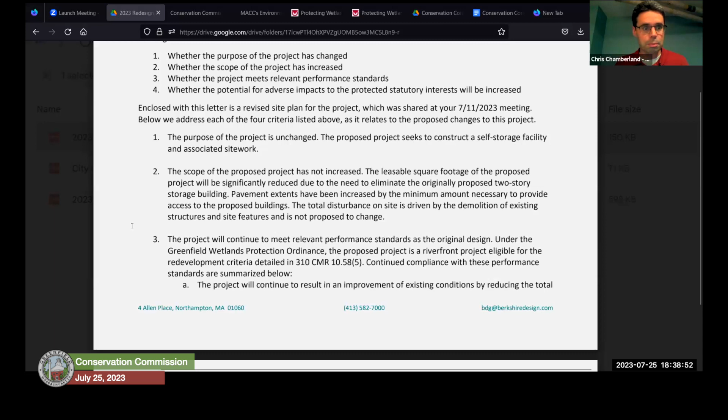My understanding from the conversation a few weeks ago was that the commission generally agreed the project was eligible to do an amended order of conditions on the first 2 points, and was potentially open to seeing the same on points 3 or 4, but required additional information. Shortly after that meeting, I submitted a letter covering all 4 points for the record, specifically addressing points 3 and 4 in detail. I can go through it if everyone has read the letter, or we can just do questions.

Yeah, and I just shared... oh, am I muted? No, I just shared that. I was muted, I forgot I was muted. So this was the letter that we received. Hopefully everyone's had a chance to look at it.

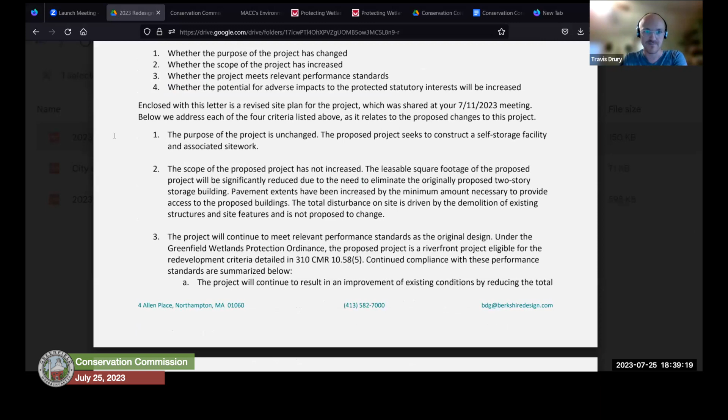So number 1 there is whether the purpose has changed. I don't know if anyone has any questions off the bat, or maybe it'd be good if you just wanted to walk us through the ones we were a little unsure about.

Sure. Question 3 is about performance standards. Essentially what I've done here is look at this new design and how we plan to show that it continues to meet the riverfront standards, because under the local bylaw we're in a riverfront zone, and on this site we're applying the redevelopment criteria, which is how the original project was approved. I'll quickly go through each of those riverfront criteria.

I'm going to pull my regs out, because I always write these letters showing just the answers, but sometimes I get confused on what the question was 2 weeks after I wrote it. So the first riverfront standard is to create an improvement upon existing conditions.

Here we are continuing to have a reduction in total degraded area on the site. We have existing work that runs practically right up to the edge of the stream, and in the proposed condition, all degraded area will be at least 25 feet or more from the stream. Additionally, in the existing condition there is no stormwater management whatsoever, and we're building stormwater management that will significantly improve both infiltration and water quality.

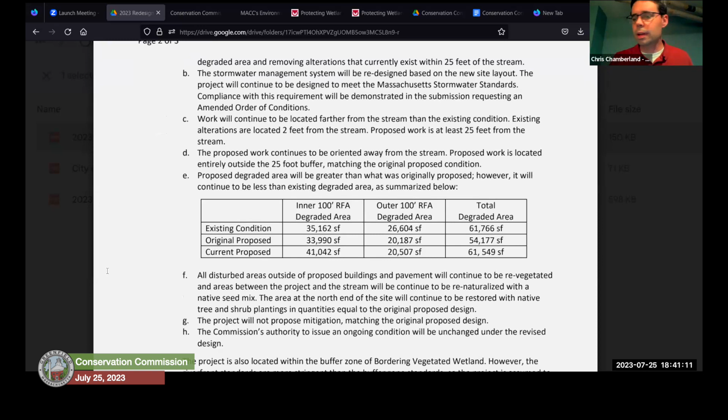The second point is that the project meets the stormwater standards, based on preliminary design, and we are still working on finalizing the stormwater design. We will probably still be working on it right up until the moment we submit our revised package to you, but I don't see anything that's going to prevent us from meeting the standards to the same extent we are now. I go into that a little in number 4, so I'll address that in more detail in a second.

Criteria C is about locating further from the stream than existing conditions. This one we continue to meet. Like I said, the existing alterations come right up to the edge of the stream bank, whereas proposed work respects the Greenfield standard 25-foot no-disturb zone. So we're certainly further back than existing work in that case.

Can I just clarify, I'm pretty sure when you're saying existing conditions, you mean before any work is done on this project? True, yes, not the original NOI or the existing approved plans.

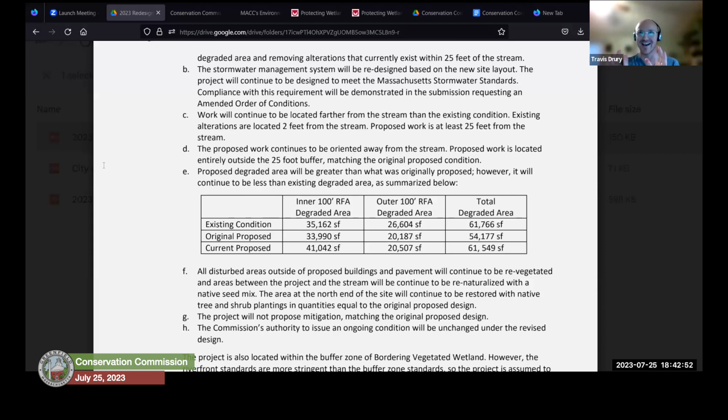Yes, so this is essentially a preview of how we will show our new design complies with the wetlands protection standards, redeveloping from the condition before we got on site earlier this year. I just want to point that out because I think in the last meeting we were talking past each other for a few minutes, where some of us were saying existing as in what's on the ground, and others meaning existing as the approved plan.

Yeah, and so the vocabulary I used here was, I typically tried to say pre-development, but pre-development and existing meaning what the site was before the project started, versus the originally approved condition. Let's try to manipulate the language on that one to keep it clearer. Okay, thanks.

Condition performance standard D: proposed work shall be located outside the riverfront area, or toward the riverfront boundary away from the stream, with a couple of exceptions. The entirety of this site is riverfront area, so it's impossible to be outside of the riverfront area and still construct a project.

But as noted before, at a minimum we are respecting the 25-foot no-disturb zone, which is the locally imposed no-disturb zone. To the extent we can, while still meeting the goals of the project, we've tried to bring things further away from the stream. The footprint of disturbance of this project is really driven by the demolition side, because of the extensive alterations on the site. So the total limit of work is really unchanged from what has been approved.

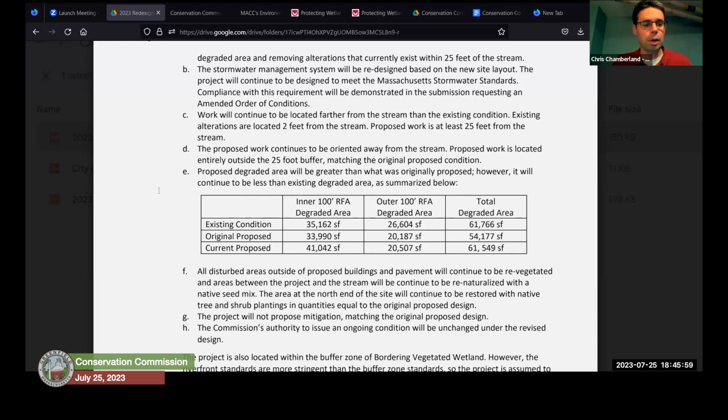However, there will still be a reduction. We will not exceed the existing condition from the beginning of the project for degraded area. And again, as I mentioned, total disturbance is unchanged from originally proposed and approved.

F deals with restoration, and the approach here is really unchanged. The limits and locations of where restoration will occur have changed, but at a high level, there will be a limited amount of formal lawn area at the front of the site to dress things up along the street, primarily between the buildings, pavement, and the street. All other areas are proposed to be planted with a conservation seed mix of native species.

I don't remember the exact spec, but it's from New England Wetland Plants. That covers all the edges between the proposed work and the stream and wetland areas. We'll get that native seed minimally maintained. And we're going to continue the restoration area we had proposed at the north of the site, with more robust plantings including some native shrubs and trees.

If you'll recall, that's the area where the building—the old rug building itself—went right up to the edge of the wetlands. That building has come down, and that area is slated to be totally restored in that extra-sensitive 25-foot area with native species and more robust planting.

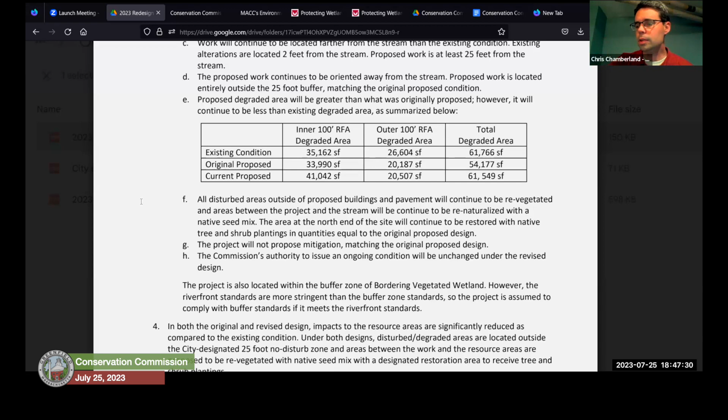G is about mitigation, which we are not pursuing because our proposed project does not exceed the existing degraded area. Standard H is just notice that the Conservation Commission, as the issuing authority, shall include a continuing condition prohibiting future alteration within restoration and mitigation areas, with a few exceptions. That's the Commission's power—we have no say over that, but we're noting that we understand it'll still be true.

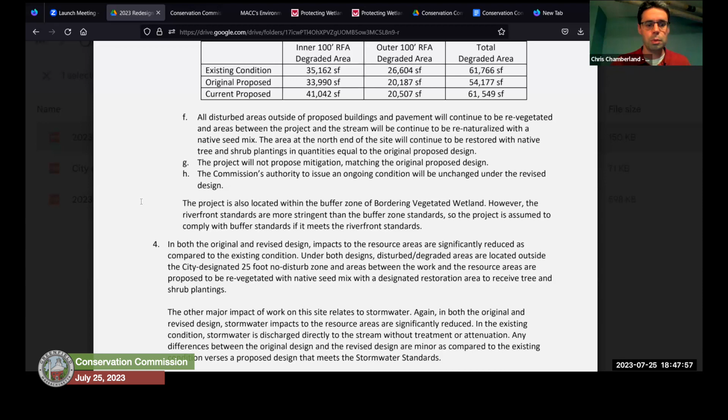I'll quickly note that while under the local bylaw we're in riverfront, under the state bylaw this is a buffer project. The standards for riverfront are generally accepted to be higher than the standards for buffer, so if we continue to comply with the riverfront standards, I'd say we pretty clearly comply with buffer standards.

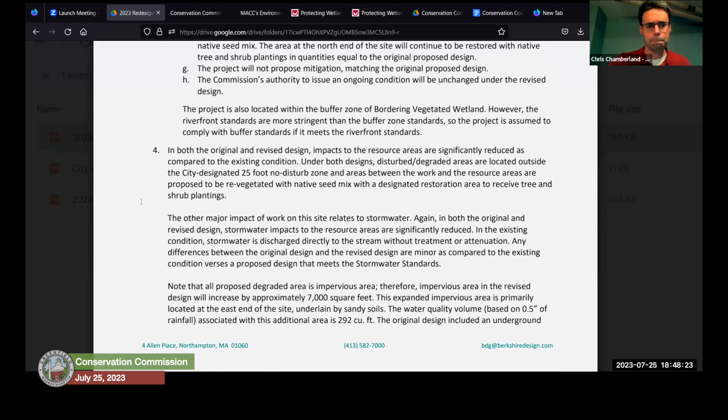Point 4 is whether the potential for adverse impacts to the protected statutory interests will be increased. This one is a little bit in the same vein as number 3, but a bit more broad, so I broke it down to look at it a couple of ways.

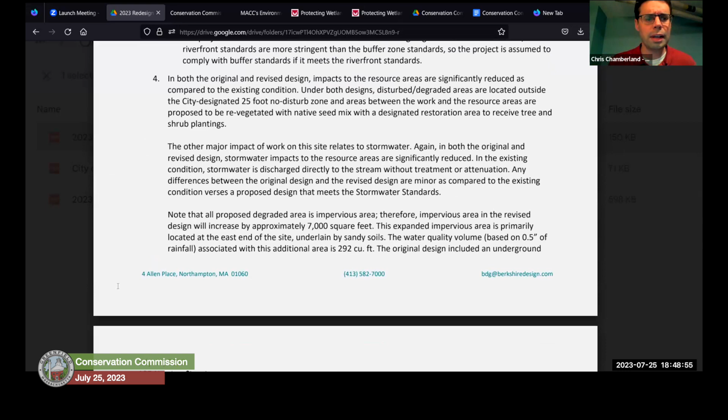Under both designs, disturbed and degraded areas are located outside the city's standard 25-foot buffer, as I've said a couple of times already. We're revegetating with native seed mix, so that perimeter area separating our project from the wetland resource area—we're still proposing to treat that the same way, with the same minimum offsets.

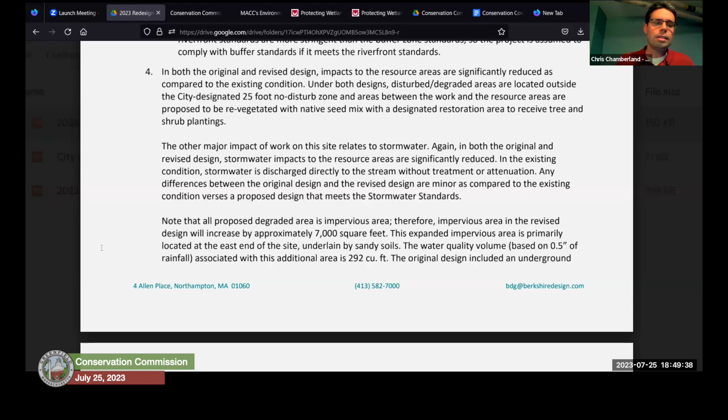We're still going to try to ensure that we're catching snow piles in areas where sediments can settle out, and we're still putting in that renaturalized buffer with natives between the work and the resource area. The other, probably largest, impact on resource areas on the existing site is stormwater. In the existing condition, you've got building and paved areas, compacted gravel, and all sorts of disturbance that runs off straight into the stream.

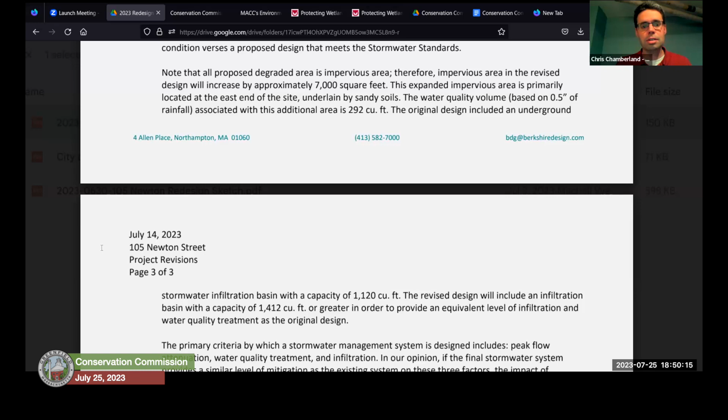In the approved plans, we implemented a stormwater management system that captures virtually all of the impervious area and either treats it for water quality or treats it and infiltrates it, and also avoids direct discharges to the resource areas. Really the only areas that drain directly to the stream are now the vegetated, revegetated areas. I want to say that we have almost no untreated discharges from impervious surfaces on the site, with the possible exception of one of the small buildings to the south.

The proposed stormwater management system is going to have some adjustments, but it's going to work very similar. We're still going to have an underground infiltration system in the part of the site where the soils are good. We're going to need to increase it because we've got more impervious area than was proposed in the approved plan. So I've shown here what the additional water quality volume associated with that additional proposed impervious area is, and I'm very confident that we're going to be able to increase the infiltration system to provide that additional water quality volume.

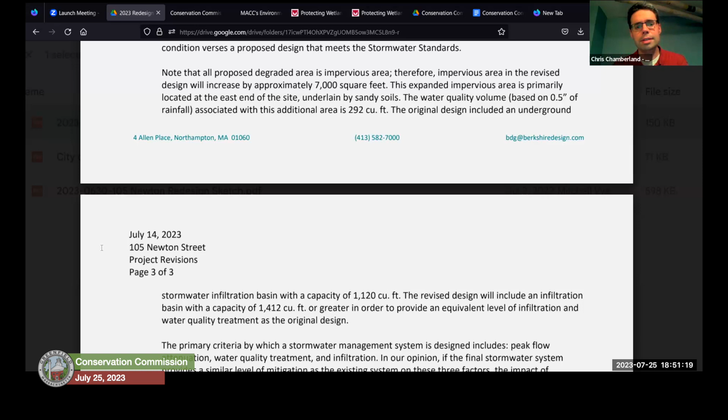We're going to continue to capture most of the pavement on the site and treat it through the Stormceptor water quality units. We're going to continue to have a rain garden at that north end of the site where the soils are poorer, to capture the impervious area and then under drain that to the city system. We're going to adjust the sizing, but I haven't seen anything yet that's going to prevent us from essentially meeting the same benchmarks in terms of peak flow attenuation, amount of water infiltrated, and water quality.

And the caveat to all of this is, if I show you that that is true after the system is designed, then I think we would pretty confidently say that our level of impact from stormwater on this site is equivalent to what's already been approved.

And then just as a wrap up sentence, essentially saying what I just did, so I won't say it again.

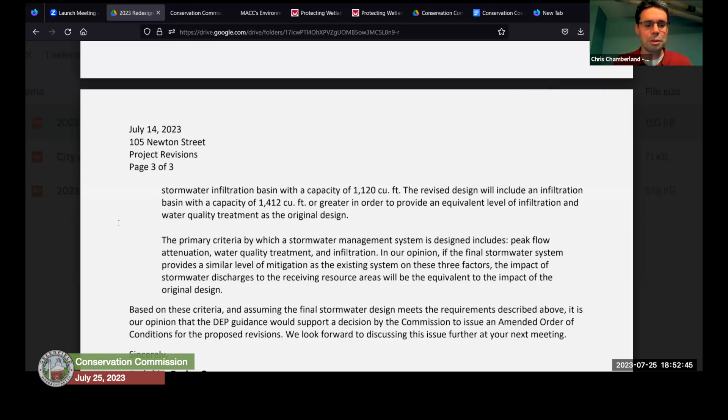That was going to be my question, Chris, is you've rerun some of the calculations, but haven't generated a new stormwater report, correct? Yep. We are actually, just the last couple of days, getting close to a final grading plan, and as you say, ran some initial stuff. I don't see any red flags, but drainage design's an iterative process, so it's going to be ongoing for a little bit still.

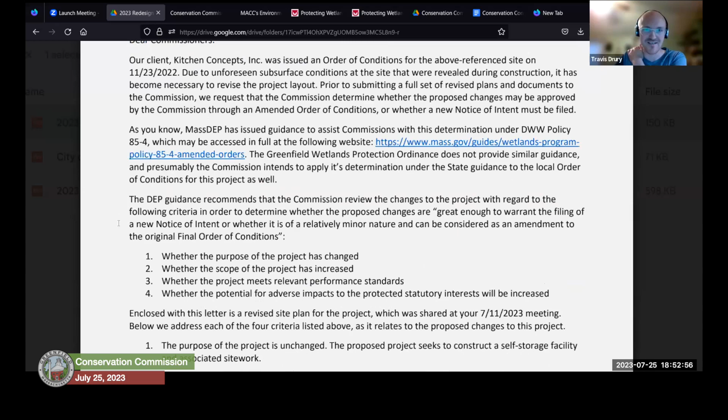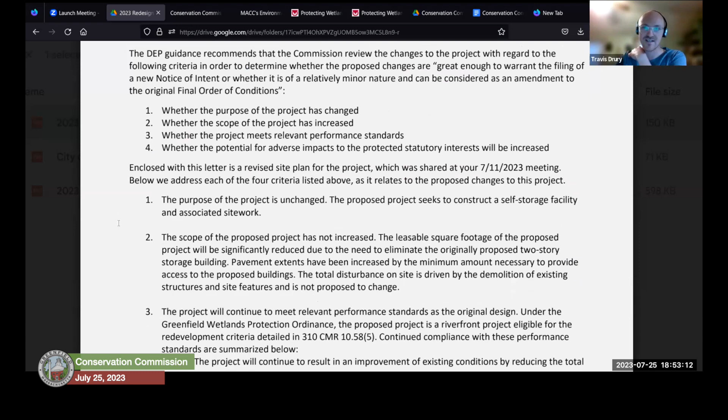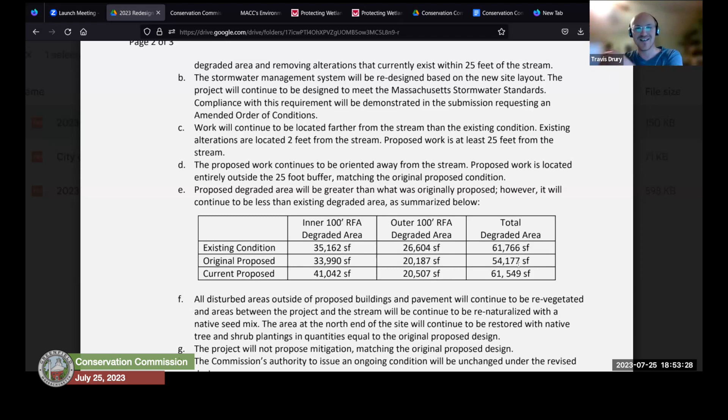Well, thank you for putting together this letter. I think this is very helpful, at least I feel like it is. I think one of the things in the last meeting, I was kind of hung on number 4, whether the potential for adverse impacts to the protected statutory interest will be increased, and especially with the amount of the extra pavement that there would be, and how it's actually increasing the degraded area compared to the original proposed. But I think something in my head just clicked while you were doing this presentation.

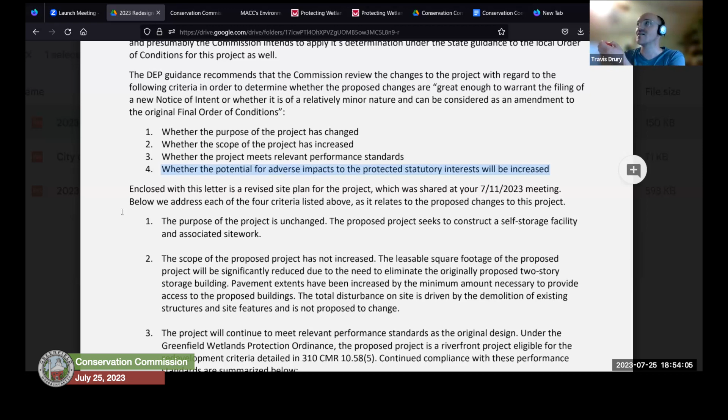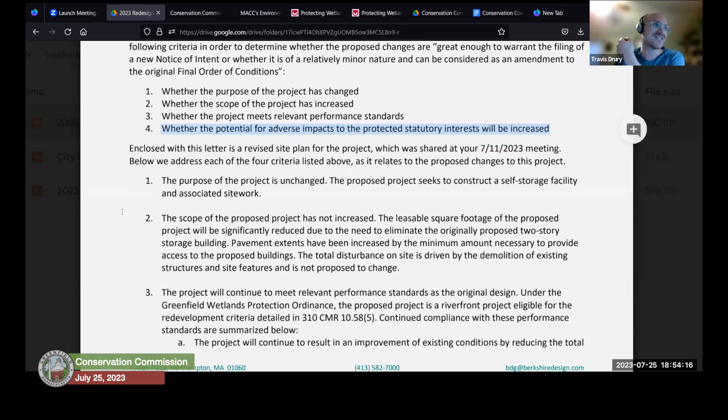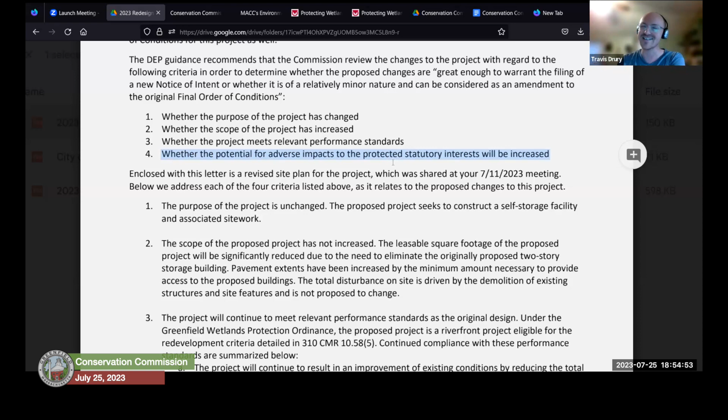Now the way I'm reading this is the potential for adverse impacts to the protected statutory interests - if it sounds like the approved plan and this plan are both redevelopment and should be improving over existing conditions, then it's not adding any adverse impacts, but perhaps we would say it's not giving as many beneficial impacts. It's not as beneficial, but that doesn't mean it's adverse. The way I'm reading it right now is the potential for adverse impacts would be like if we're changing the plan and now we have to pave over this 50 feet of wetlands that we weren't going to pave over before - that's actually having adverse impacts, instead of, we have to reduce our rain garden size. So it's still going to be better than it was, but it's just not going to be as good as it was. I guess I feel like that's less improvement as opposed to more adverse impact. That's kind of how I'm feeling.

It depends on what it's referencing there. We don't have to answer 100% emphatic yes to every one of these questions for us to move the project forward. But I say that because I think the way I'm reading this is it's saying the amended conditions versus the proposed project, or amended project versus the proposed project. But I could be wrong. Yeah, I hear what you're saying, whether it would have potential for extra adverse impacts.

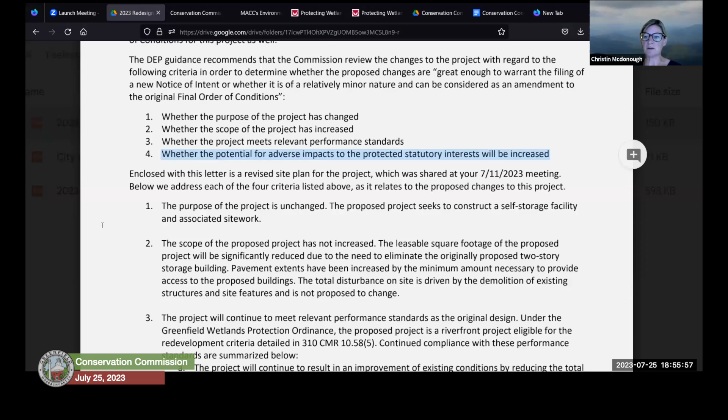But 7,000 square feet of impervious surface next to a wetland system is potentially adverse with a storm event that overwhelms the drainage, but it's not huge. Well, that's to the inner 100, that's the inner riparian zone. My question is, how are you beefing up the restoration or mitigation to compensate for that additional 7,000 square foot within the inner riparian zone?

I'm just curious, what's changed from the original submittal that will sweeten the pot to compensate for that, to offset that additional impact? Yeah, I think that would be fair.

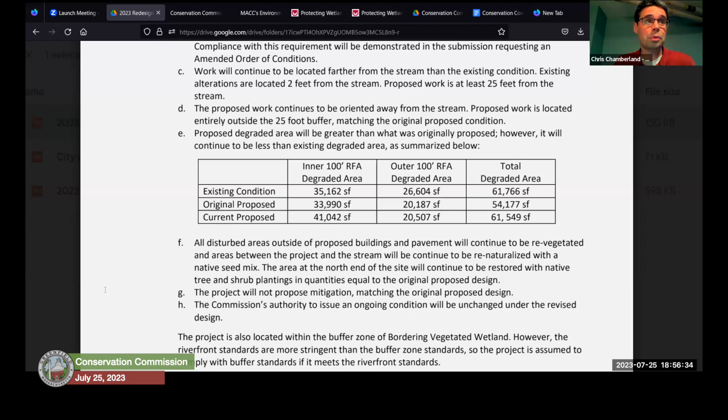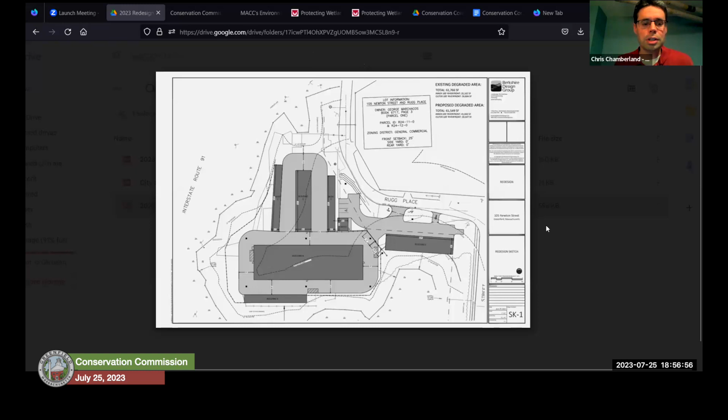Our original plan focused all of our real restoration effort on the northern end of the site, though of course we reseed everything on the backside of the property. So in reflection of the fact that we now have a relatively small reduction in degraded area versus the existing condition, I think it's fair to continue extending that restoration area around.

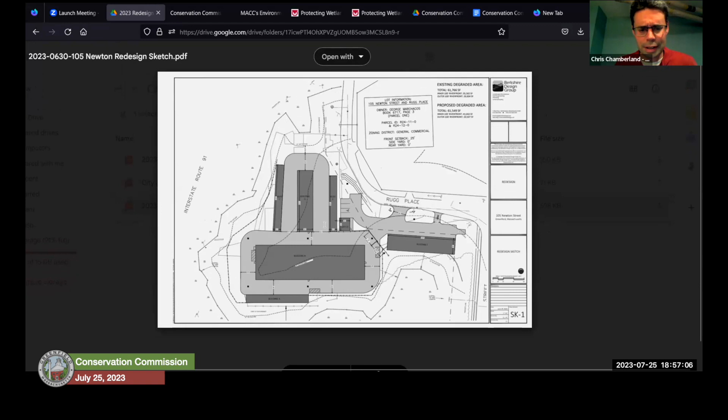Let me see if I can point to this instead of waving my mouse where you can't see it. If you have plans you want to share... How about I do it and then I can point to things more clearly.

In the originally proposed project, all the planting was focused on this buffer here with the shrubs and trees, and all of this area was just reseeded with natives. I think in light of the fact that we now don't have the major decrease in degraded area that we were proposing before, it would be reasonable to increase the extent and impact of the enhanced restoration planting, which we can easily continue.

If we were focused on this area before, we can round the corner behind the site over here. There's also lots of area that, while not wetland, is pretty sensitive down in this area that was just slated for native seed restoration. I think we can certainly increase our true restoration area in light of the fact that our degraded area is also increasing relative to the approved plan.

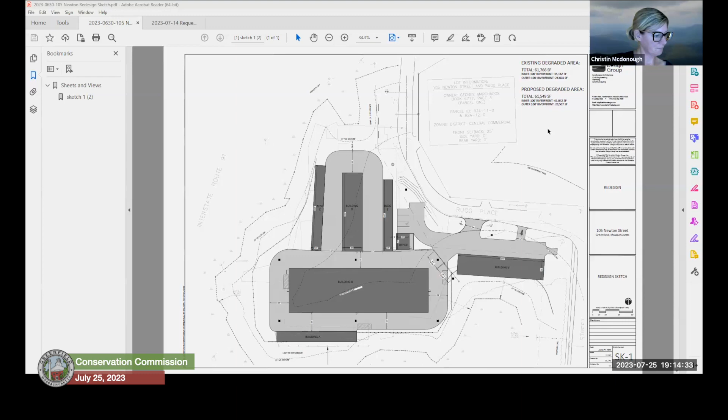Okay, so we will vote on allowing them to file an amended order of conditions. Fletcher, aye. Christin, aye. All right, and I am also an aye. So you have our approval to file an amended order of conditions.

Thank you, appreciate it. Obviously, we did not want to waste a whole lot of time going down the wrong road, so this is helpful guidance. All right, thanks for going through all those details with us. Yes, and that gets us a head start when we come back with the real evidence. Yeah, thank you. Okay. Great, and we'll see you soon. All right, have a good night.

Okay, so next we have on the agenda any topics not reasonably anticipated 48 hours in advance of the posting of this agenda. I'm guessing maybe there's an emergency order. Yeah, we have, boy, three emergency certs.

That's it, that's it so far. There were like 24 in Deerfield when I went to a site walk with the Deerfield Concom last week. Wow, on Friday. Man, yeah, they have it bad. Franklin County is bad.

I think we have someone here from DOT. We can start there. Sure. Hi everybody, I'm Billy Lee. Hello, I'm the Mass DOT District 2 environmental engineer.

I actually, right before this meeting, sent Mitchell over the emergency certification request for some Mass DOT improvements on Route 2 off of Adams Road, right over the Fall Brook, not Fall River, Fall Brook crossing. And Mitchell actually signed that, so we have the executed emergency certification. Work has kind of been ongoing since the storm, just like emergency stabilization of the embankments, but essentially what happened at that location was obviously severe storm events and flooding caused erosion on the eastbound side of Route 2, very proximate to the Fallbrook Road stream crossing.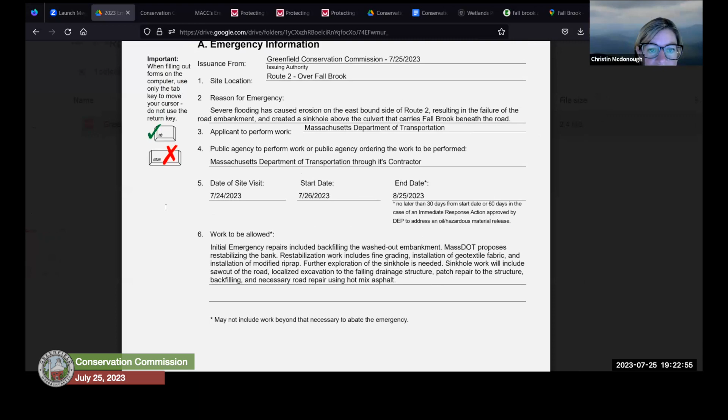I'll make a motion to ratify the emergency certification for DOT on Route 2 for the Fall Brook culvert. I'll second that. Any other discussion on the motion? We'll do a roll call vote on ratifying the emergency certification. Fletcher, aye. Christin, aye. And I'm also an aye, so that certification is ratified.

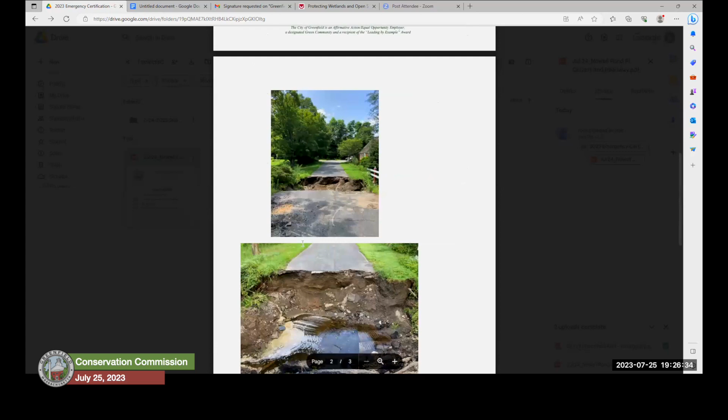What's the existing pipe diameter? Is that a replacement in kind? 24. Wait, what's the diameter, 30-inch to 30-inch? It's 24 to 30. Oh, 24 to 30, thank you. That's right, I thought you said 184. Sorry, that's what I thought he said too. That's what we need, that's what I was thinking.

184. Just curious what the bank full is, and if that does or doesn't meet stream crossing standards. As a reminder, the Massachusetts stream crossing standards generally require open bottom when possible and 1.2 times bank full width. I'm just curious if a 30-inch is going to be sufficient.

Did we say this was a named stream? I can't find it on Google Maps. I'm going to MassMapper. This was one I saw in an email — Mark Stinson was emailing about whether there were any emergency issues in Greenfield, and this was one that he said was a perennial stream when Mitch sent it.

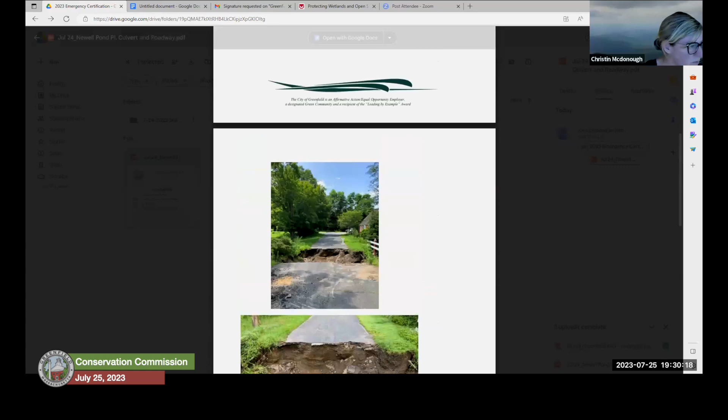Newell Pond Place — oh, I'm on Newell Pond Road. That's why. That will do it, I'm in the wrong place. Oh yeah, okay, never mind. I see it, definitely perennial. Does have a name.

Mark said you can require an upgrade, which sounds like they are proposing. Whether it's upgraded enough, I don't know, but it does sound like they want to put in a bigger culvert, so that's good at least — a total of half a foot more in diameter, it sounds like.

Well, I recognize that they're kind of in a jam. It would just be nice to see that upgraded to a place that isn't going to come back before us in a year with all these climate change storm events.

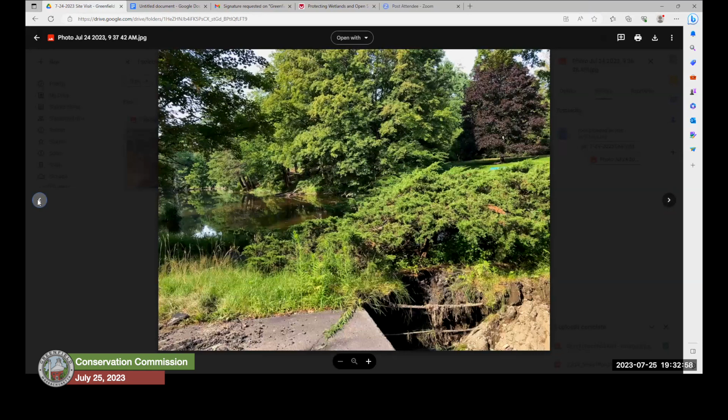All right, there is something on NAC. It's weird because in the pictures it just looks like, oh maybe that's where it comes out. Oh, I see them now. Okay, there they are.

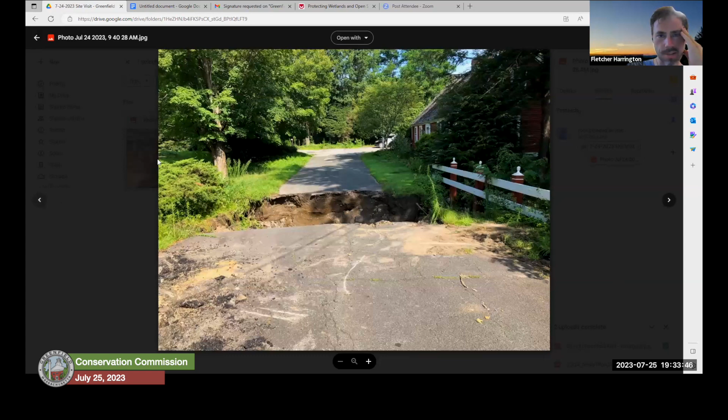Can you imagine how much water was coming through there? Yeah. Hmm, I think a bridge would be the treatment here. But look at those little culverts down there on one of the pictures of the site visit. Still submerged. Yeah, go back one more.

Down there, sure, yeah. There is a report on the NAACC website, and it's for Newell Pond Place. There's a lat long. I have a feeling it's this culvert. So it has been already identified as a culvert needing to be replaced. And they say

crossing connects two ponds. They said it's a 2-lane road, so maybe it's on the road, not the driveway. Does it go across? Yeah, I think that's technically a road. Looking at it on Google Maps, it looks like there's technically a road there, and then it's a driveway after that. They say there's got to be bankful, I'm sure, on this, and we could always do a StreamStats to get bankful.

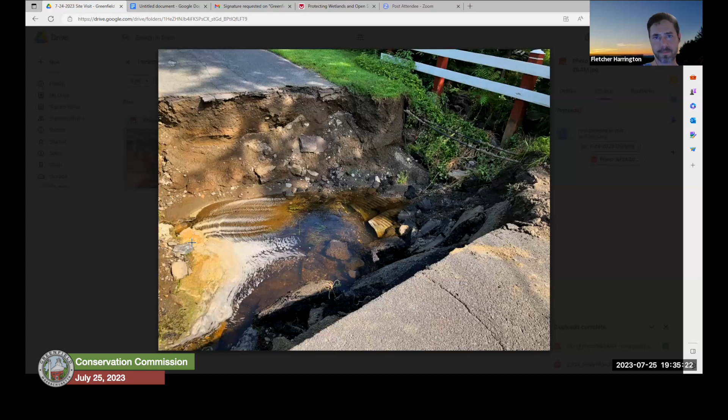And classified. Comments: inside a portion of the bridge structure, 3 non-embedded metal pipes side by side. That sounds about right. So 3 of them, it's 3 pipes. And what was the proposal? They wanted to replace with 2? Well, they say there's 2 existing. Oh, it does look like that in the picture.

Well, I don't know, anyways, I just wanted to point out that it sounds like this is the same site and it's been identified for grant funding to be replaced and upgraded. Hmm, well it'd be good to let them know. Yeah, I don't know if that makes any difference, if there's an emergency certification that's been ratified, that will increase its priority in that queue. I'm not sure how it works. Now I'm curious though, I want to see what the bankful is.

So I did the stream stats for that. What were you looking for? Bankful, the stream bankful width. Bankful width, 11.1 feet, it says. Okay, so then that 30 inches isn't going to cut it. That's what it says. So it's possible that's wrong, but I think it would need to be a minimum of 13.5 feet, so it would need to be like a bridge or box culvert.

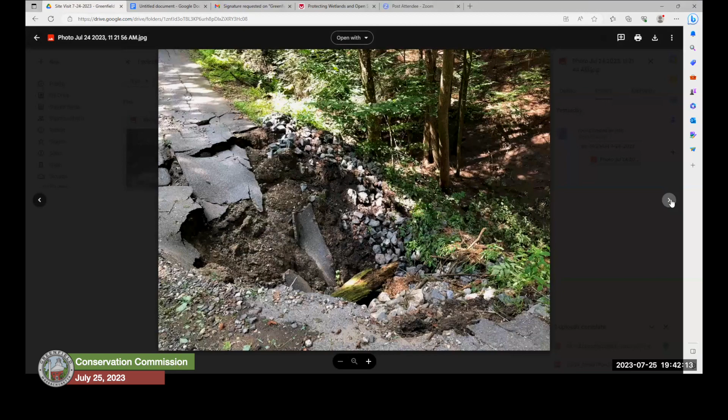And that is a personal driveway. Yeah, it just leads to just that one house. So we said replace damaged culvert and washed out driveway, new 48-inch culvert, bring the grade up, sloping and riprapping the banks along the way.

It doesn't say the current size. No, I just got this. I figured we would need more information from him, so I could sign this tomorrow. We just kind of figure out what we might need today.

These are kind of remarks and notes. Yeah, that's what I was wondering. Fire department, police department, building inspector, board of health can declare the emergency. I think because it's a private driveway, one of those has to declare an emergency for us to approve an emergency certification. Fire department declared the emergency.

Okay, I just didn't see that. No, I had to give him a call. Okay. But we don't have an emergency certification form filled out or anything? No, we just asked for that by email, like the narrative.